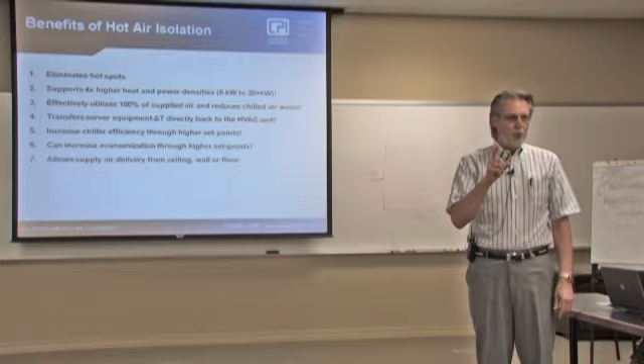So the one thing that we need to rely on that differentiates us from everybody else is the fact that y'all are smarter than their guys. That's the one place where we can play. And so my job is to help you get there to deliver that. How important that is here, real quickly.

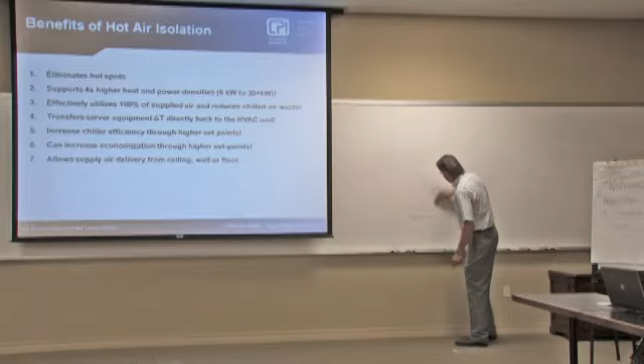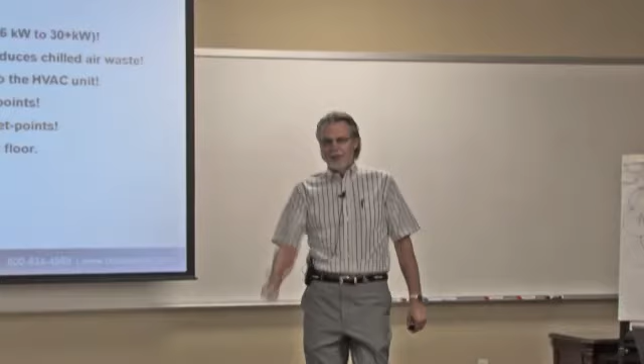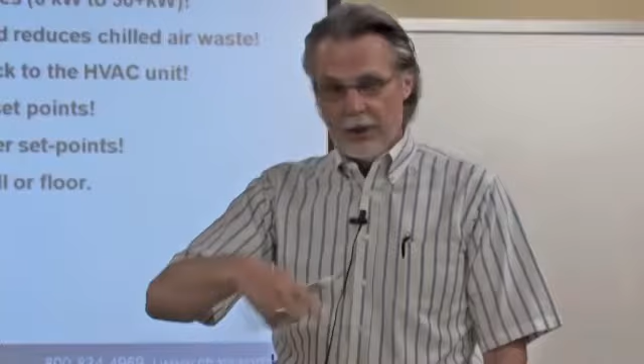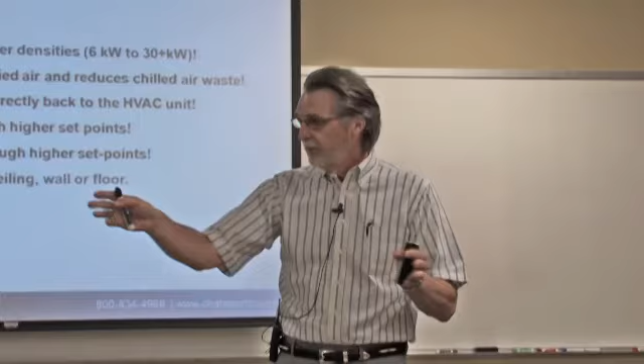This is going to be a 30-second course in fan affinity law. All right. Fans have revolutions per minute. All right, how many times the fan turns around. There's a 1-to-1 relationship between fan RPMs and the amount of air that comes out. So when the fan's turning 100%, it's producing 100% of its capacity. When the fan's turning at 80% RPMs, it's producing 80% of its capacity and flow.

However, the energy required to produce that RPMs is the cube of the proportion. I was with him until that cube. Yeah. Well, all right. Let me.

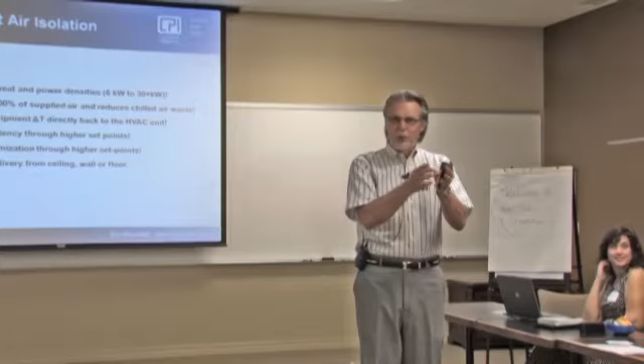So we got to when the fan's at 80% of speed, it's producing 80% of air. So we're at 80% RPM. So we're going to cube that because that's our proportion of capacity. So we take 0.8 times 0.8 times 0.8, and that's 0.512. Basically 50%, right? So if we're running 80% fan speed, we're only consuming 50% of the energy.

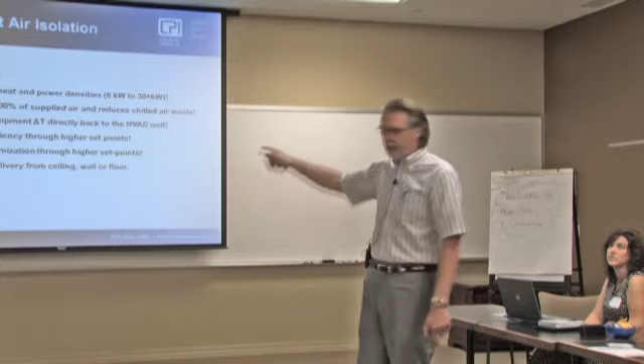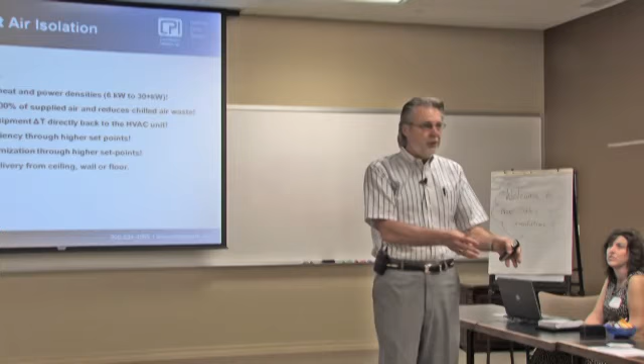All right? So when we talk to the customers about bullet number 3 here, their fan savings, it's not a 1-to-1 deal. If we get them 20% savings on the air they need, they get a 50% savings on the energy, assuming they're using air handlers that have variable frequency drives or EC motors on their fans.

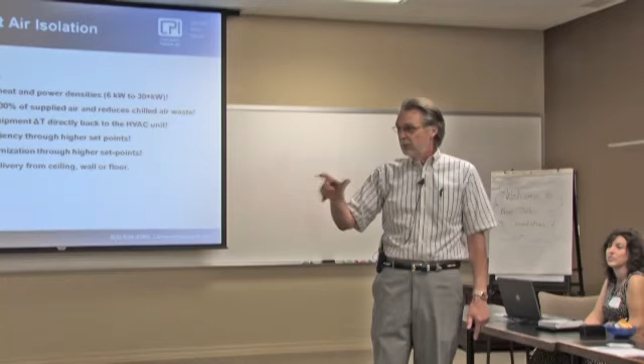If they're using really old equipment, they won't get this. The only benefit they'll get is being able to turn one off. All right?